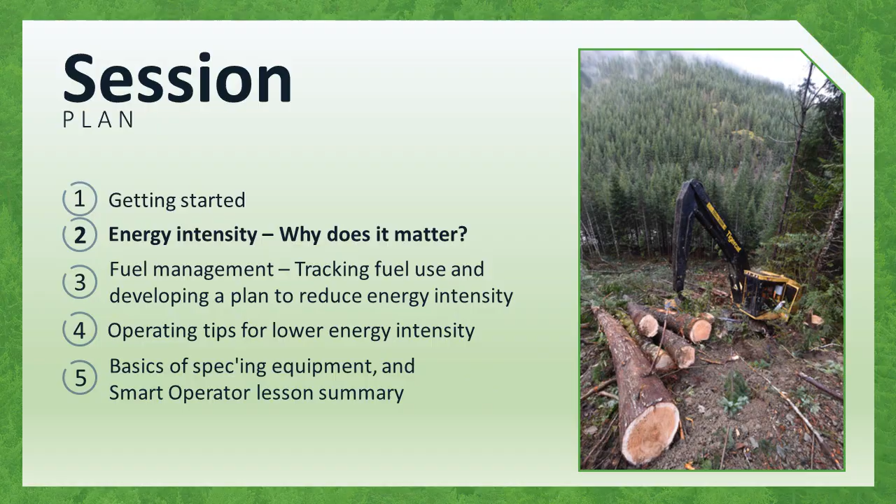Why are fuel costs important? History has some lessons. Price corrections have been dramatic, but eventually prices follow the rate of inflation, and the trend is for prices to rise higher and higher.

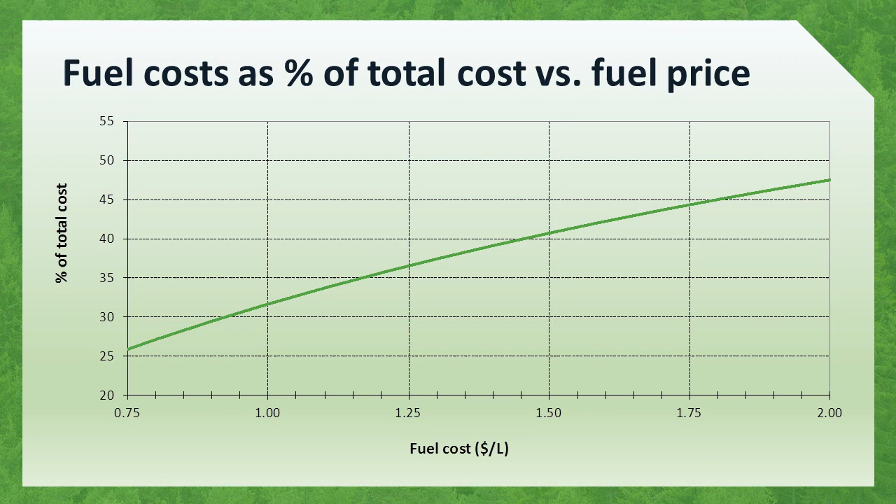When the price of fuel is low, at $1 per liter for example, fuel represents a smaller percentage of your operating costs, approximately 25% in this instance. But if the price were to increase to $1.50 per liter, fuel costs become a larger percentage of your operating costs, or approximately 40% in this case.

Keep in mind that the actual percentage that fuel represents of the total cost varies depending on other elements, including ownership costs, maintenance costs, and labor costs. For example, if you own most of your equipment, your ownership costs are reduced. Thus, fuel can be an even higher percentage of your total operating budget.

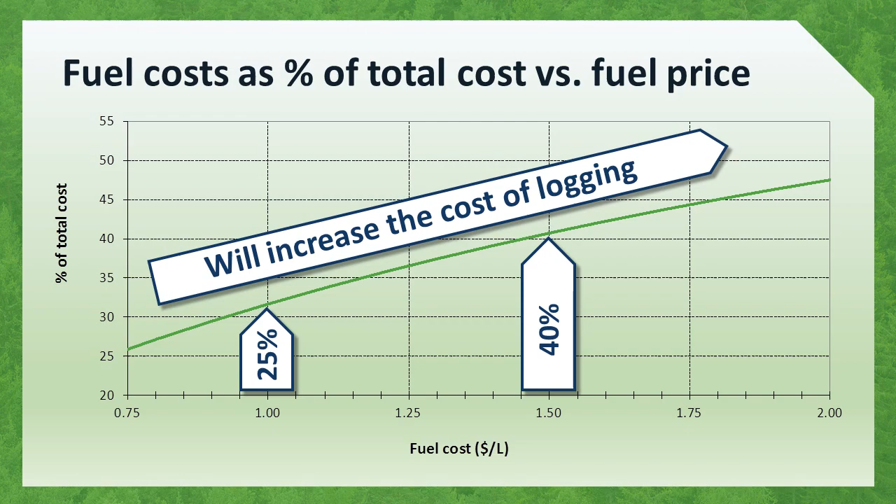What happens when prices increase? If your harvesting contract is at a fixed price with no built-in fuel surcharge, you will earn less money.

If you have been tracking fuel use by machine, you will have discovered that fuel, as a percentage of operating costs, varies by machine type. So an increase in fuel price from $1 per liter to $1.40 per liter, a 40% increase, raises the hourly cost of a fuel-efficient harvester by 4%. But for a more fuel-intense feller buncher, the hourly cost increase would be 6%. Understanding this relative difference in machine type costing is important when negotiating fuel surcharges in your harvesting contracts.

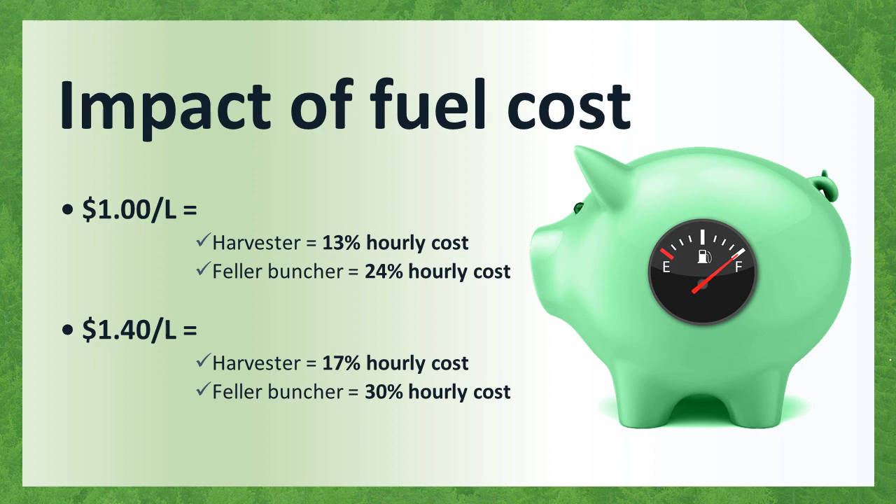Many factors drive energy intensity, or liters of fuel consumed per cubic meter of wood harvested. One of the most significant factors is the machine itself. The design of a machine determines its capabilities.

Look at the feller bunchers on this slide. One is wheeled, and the other has tracks. Which one would you choose, and why?

Consider the machine you did not choose. Would it work in your application? For what percentage of your operation, or ground type?

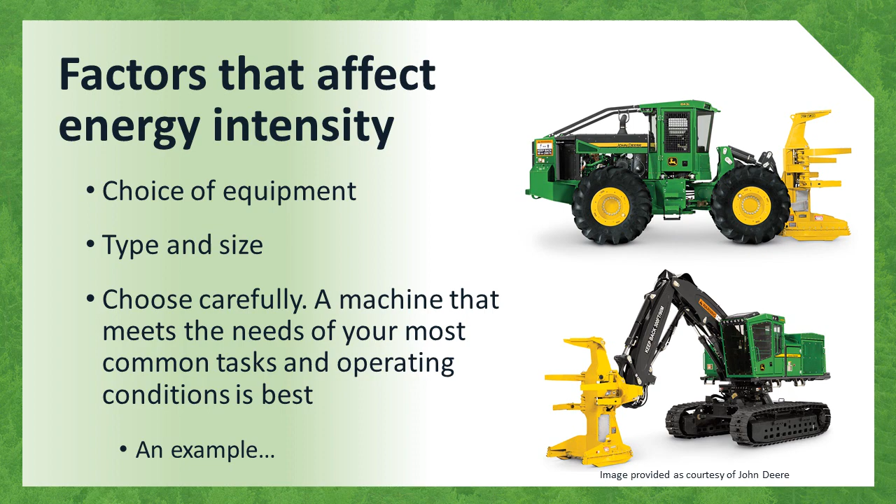Let's look at some examples. In this test, we had 3 skidders engaged in a conventional harvest. Under the particular site conditions, it was revealed that the John Deere 848 model outproduced the other machines, for a variety of reasons.

But what is relevant to this discussion is that it also had lower energy intensity. Clearly, this machine was the winner in this instance, with higher productivity and 24% lower energy intensity than the TigerCat 615. The TigerCat 630 was cheaper to operate on an hourly basis, whereas the 6-wheel drive TigerCat 615 had a traction advantage. But it proved to be slower in turning around in the flat open terrain found on the test site.

Your results will vary, as your operating conditions surely differ. Ask yourself, what are your operating conditions today? What will the conditions be in the future? Adapt your fleet to your changing needs.

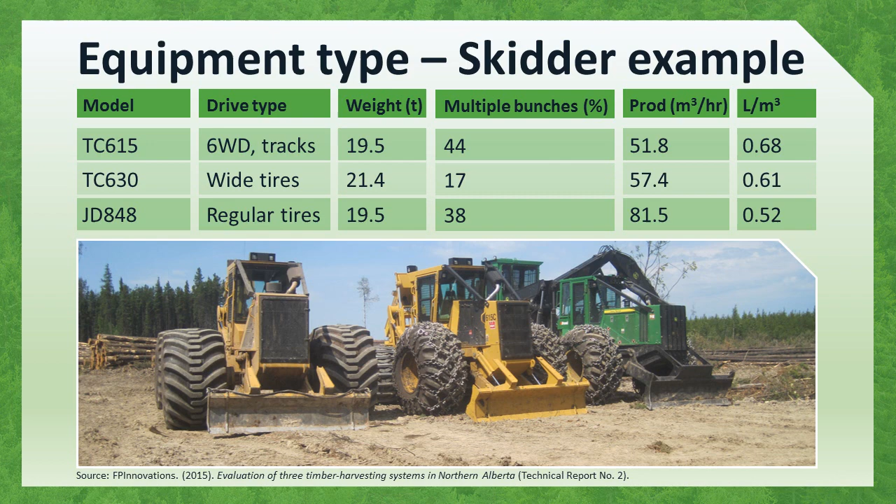How do you choose your machines when you purchase or lease? Here are the top items: dealer response time for service calls, dealer reputation for ease of warranty claims, and brand reputation for reliability, ease of service, and operator familiarity.

Perhaps you look for new technology that promises greater productivity and lower fuel consumption. Or, conversely, do you avoid new technology because it's unproven? Do you normally buy a particular brand and trust it? Or do you look elsewhere?

Narrowing down your choices based on energy intensity can help you with your decision.

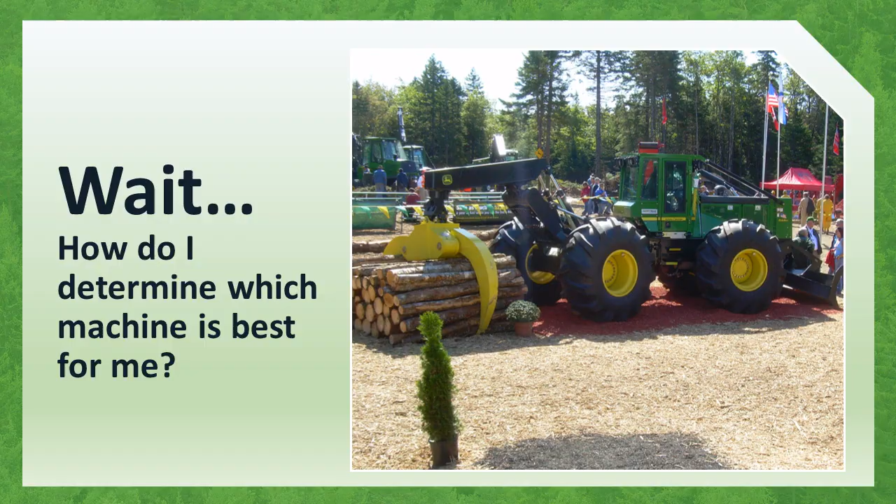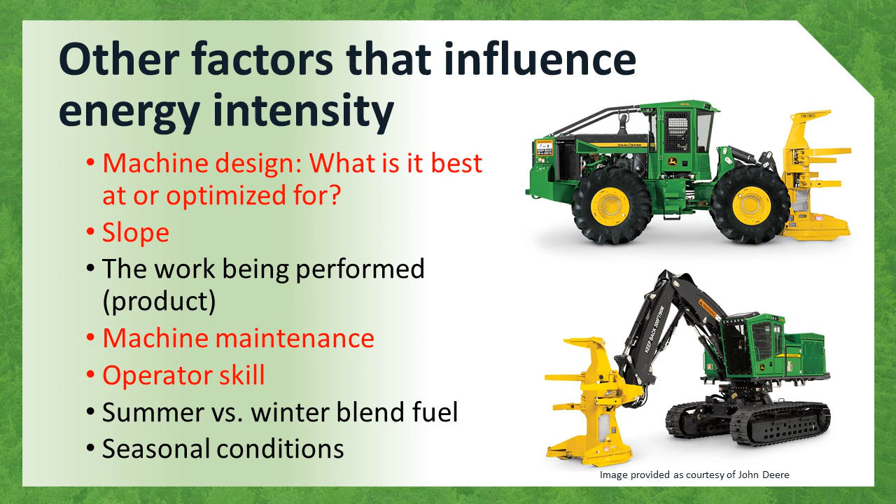For the factors in red, you can do something about the situation. For the other factors, in black, you have no influence and must instead account for the cost. Let's look at some examples.

For the difficult task of harvesting blown-down timber, we choose to use the excavator-based Link Belt 290 with a Pierce grapple processor head, which can pick up horizontal stems and buck.

This machine was compared to a purpose-built felling machine, the Tigercat 845C feller buncher with a hot saw. In this instance, the Pierce grapple processor was the right tool for the job, as it had higher hourly production and lower energy intensity.

The Link Belt and Pierce GP head combo also recovered more wood than it broke, unlike the feller buncher. Consider specialty machines, or machines with capabilities that complement your usual logging equipment. How else could machines, such as the Link Belt and Pierce GP combination, be used to improve your operations when not cutting blown-down timber?

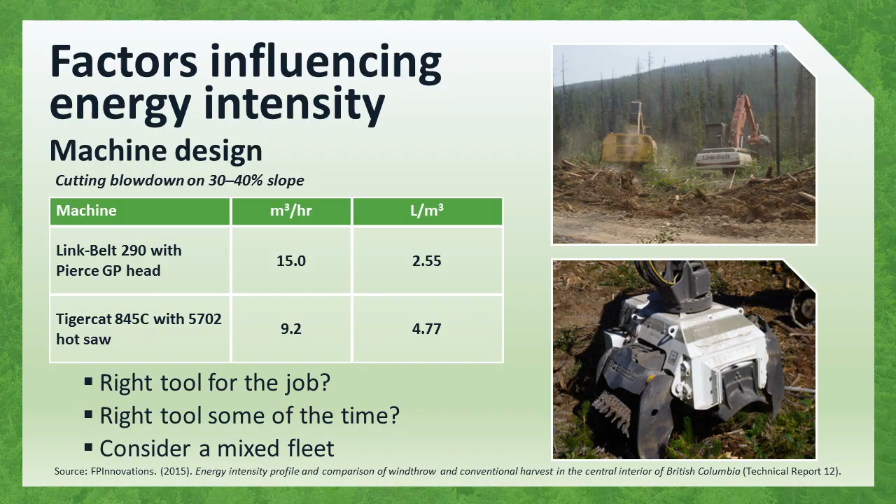When skidding loads on adverse slopes, the following happens: speed decreases, particularly when approaching the machine's maximum grade ability. Fuel consumption decreases for favorable grades but increases for adverse grades. And the most important effect of grade: decreased production. The result? The cost per log delivered to the roadside goes up.

Before deploying your equipment on the job, always discuss the best approach. Can the site be set up to skid the logs down slope? If so, make adjustments before burning the extra fuel.

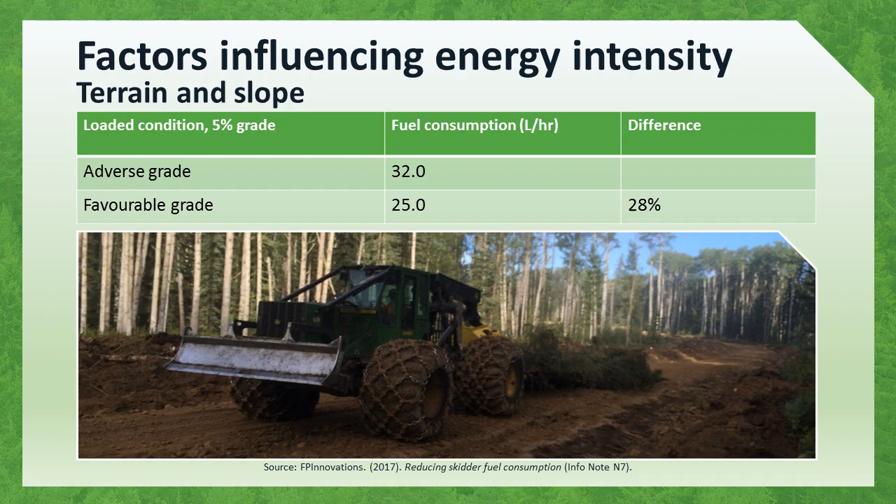Sometimes machine choice has little impact on energy intensity, and what determines the machine's consumption instead is the work being done. In this case, 2 loaders were operating in a log reload yard. Loader wait times for the trucks were the same, as the trucks were lined up and ready to go. Statistically, there is not a big difference in the performance of these 2 machines.

This is an example of a smaller engine working relatively harder than a larger engine. In this case, the work and the fuel consumed were virtually the same. Because the smaller engine must work harder, it may have a shorter economic life and need more frequent maintenance, which are important factors to consider.

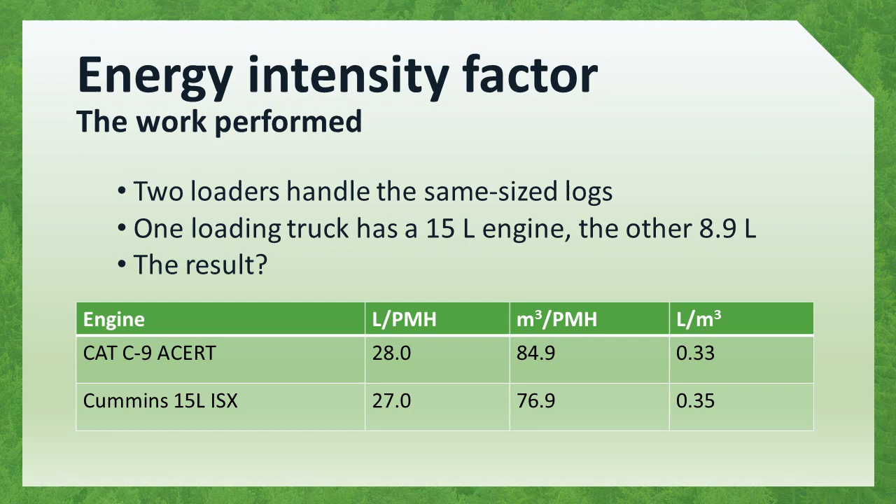If you anticipate your loader leading a hard life with a high duty cycle, consider purchasing a machine with a larger engine or a machine in a higher weight class. Alternatively, if you anticipate your loader being subject to a lower duty cycle, or if you value the lighter machine's portability, consider the smaller machine with its smaller engine.

Maintaining your machine is critical in getting the best performance. A hydraulic tune-up is an essential maintenance activity for a machine such as a feller buncher that has a complex hydraulic system. It should be done every year. This corrective maintenance reduces fuel consumption, increases productivity, and lowers energy intensity, about 20% in the case of this particular feller buncher.

In all, the repairs in this case study totaled $10,000. But with a big producing machine like a feller buncher, the payback on this maintenance investment can be in as little as 3 weeks' time.

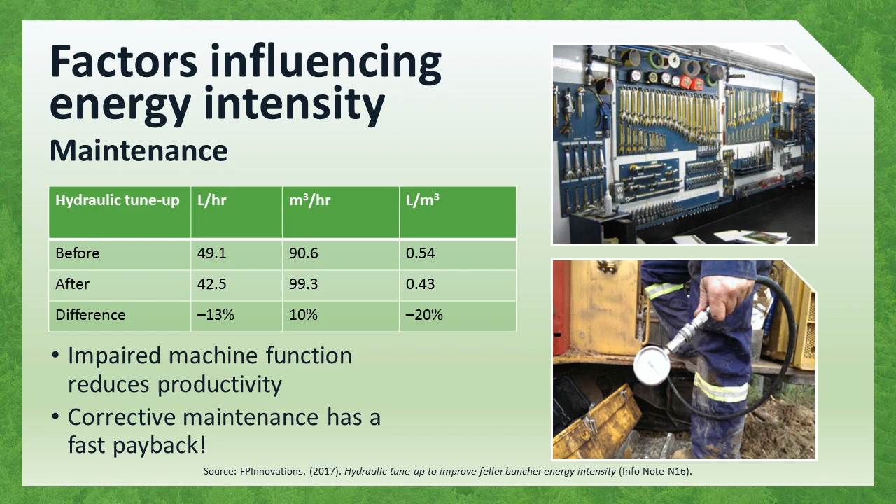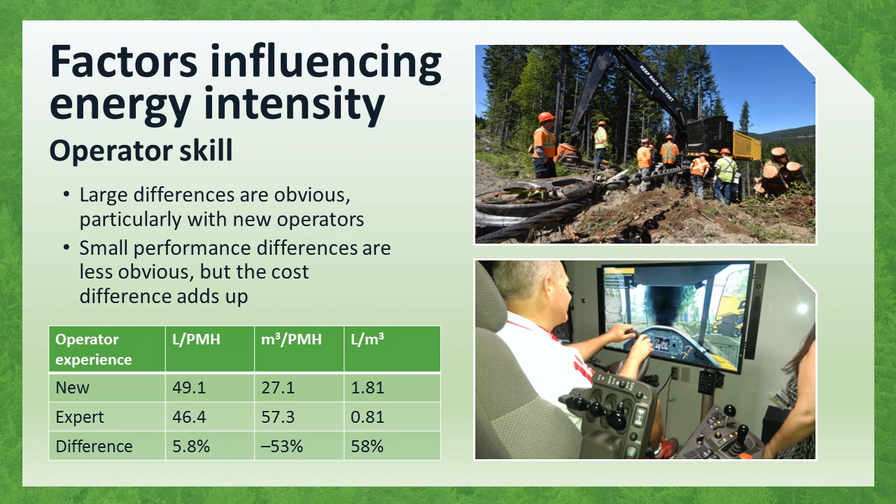We all know that inexperienced operators can mean lost production and high fuel costs, as seen here with 2 operators running identical machines on the same terrain. Getting your operator up to speed should not be left to chance. Although training can seem expensive, the payback can be substantial, as seen in this slide. Later in this course, you'll learn how to capitalize on the expertise of your equipment supplier and professional machine coaches.

Energy intensity can also be influenced by the weather. Winterized diesel blends contain less energy, and you have no control over this. However, consider these measures to reduce unnecessary fuel use in the winter.

Use a programmable cab and engine heater to speed up the warm-up cycle. Consider double shifting your machines, which could mean 1 warm-up cycle at the start of the week, instead of 1 cycle for each day worked. Use high-quality synthetic fluids that are appropriate for the season. 1 fluid spec can rarely do it all.

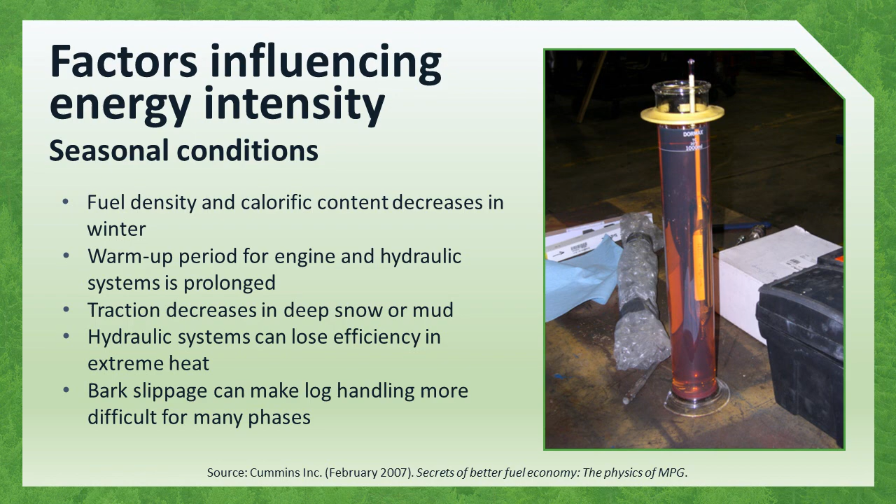Deep mud or snow can impair machine mobility. Consider increasing your operating hours when conditions are ideal, and/or decreasing hours when conditions are poor. You can't change the logging environment, but you can adapt to it.

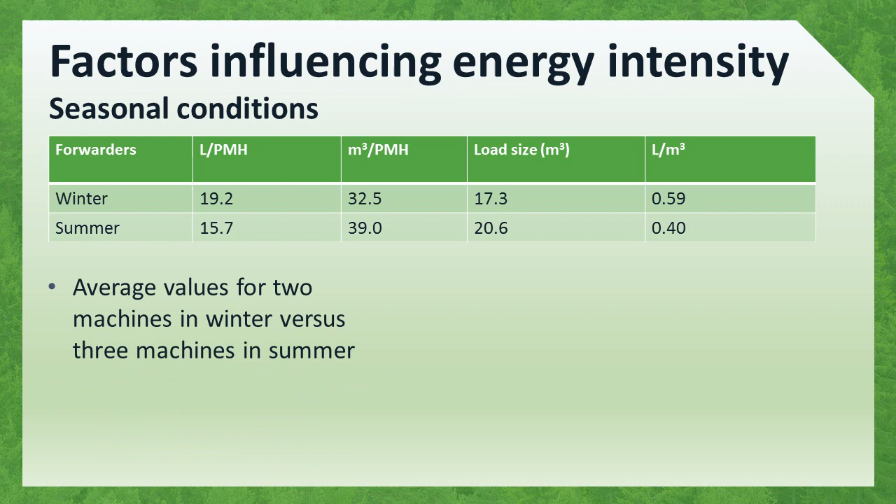Understanding your energy intensity in the winter versus the summer is critical to covering your cost and making profits. In this seasonal evaluation, we found several trends with the forwarders. They consumed more fuel due to the winter effects we discussed previously, such as prolonged warm-up cycles for drivetrain components, hydraulic fluids, and engine oil, and also fought for traction in the snow.

The machines produced more wood in the summer, with load size being significantly larger. And they had significantly higher energy intensity, or liters of fuel consumed per cubic meter of wood produced, in the winter. Not all machines display such a dramatic energy intensity difference between the seasons, so it's important to understand what drives your energy use.

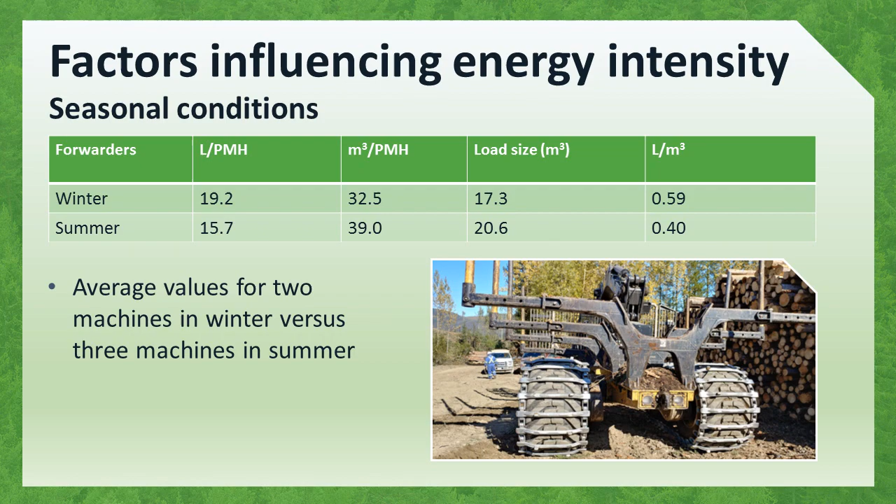In this lesson, we have learned the following: fuel cost will continue to rise. The higher the cost of fuel, the greater the proportion of fuel cost will be on the operating budget. Choose your machines wisely, as they have a major impact on energy intensity and on your wallet.

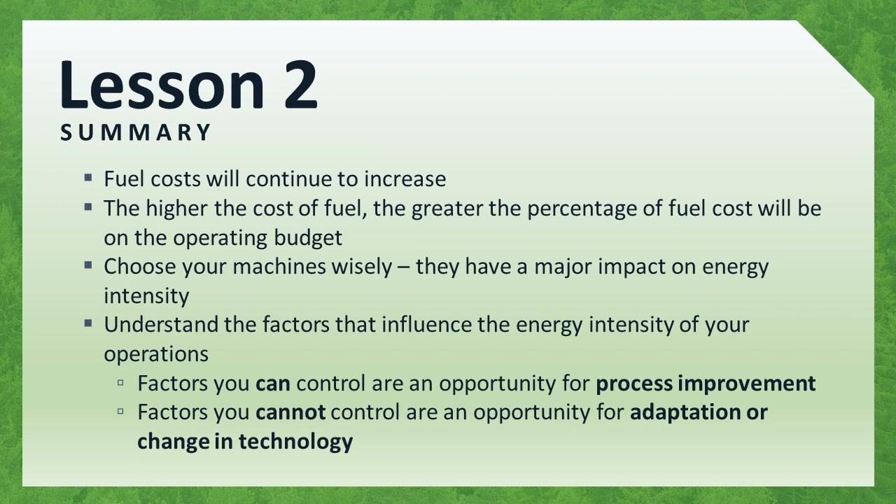Understand what factors influence the energy intensity of your operations. Factors you can control are opportunities for process improvement. Factors you cannot control are opportunities for adaptation or change in technology. In the next lesson, we will cover how you can improve your operations through machine and productivity tracking, and how you can create an energy efficiency program to help you get a handle on your ever-rising fuel costs.